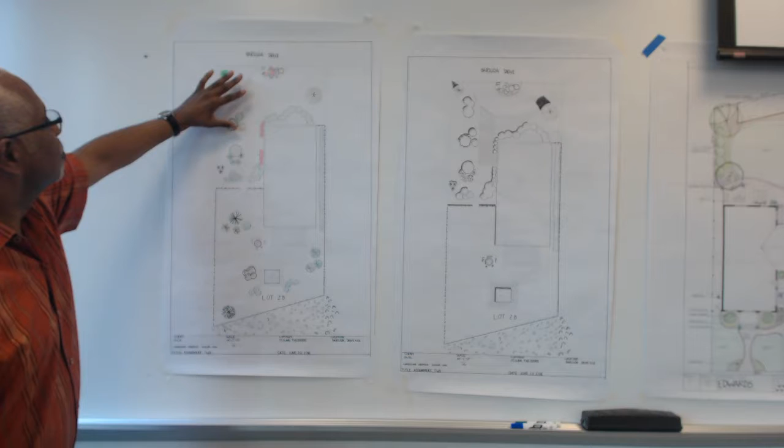The front's going to be the same, the fence. Mailbox up here. This would represent more flowers than anything else since the space is so small. But the driveway entrance is 10 feet wide, and the walkway I think I had about 15 feet. The doorway was 4 feet. Put a gate to the back of the yard, fire pit, but more trees and plants in the back of

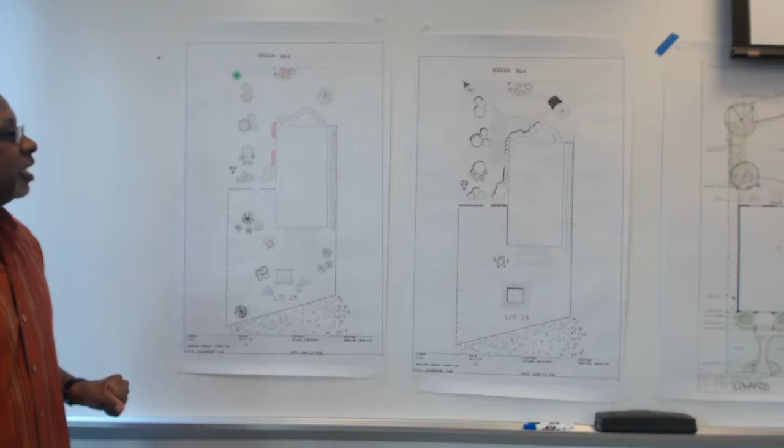this one as compared to the other. And I put wood decking around the spa this time as compared to the stone, and I did the forest land on here. The easiest thing, I guess, was getting the base plan done, and then trying to run different iterations rather than—I think some of the others had a lot of stuff in it. I made the judgment call to just try and do things differently, a little bit simpler.

The last one I have actually has the measurements for the fence line itself, the property line, the dimensions for the driveway, and that's how I broke that down. I didn't want to get too cluttered with this since I'm learning how to do this. It's okay, and that's all I have.

Hey Nancy, you want to go? We've already discussed it, but you guys didn't hear.

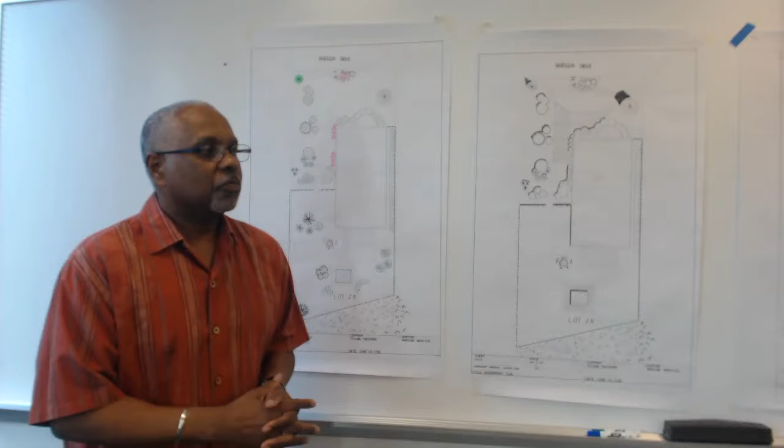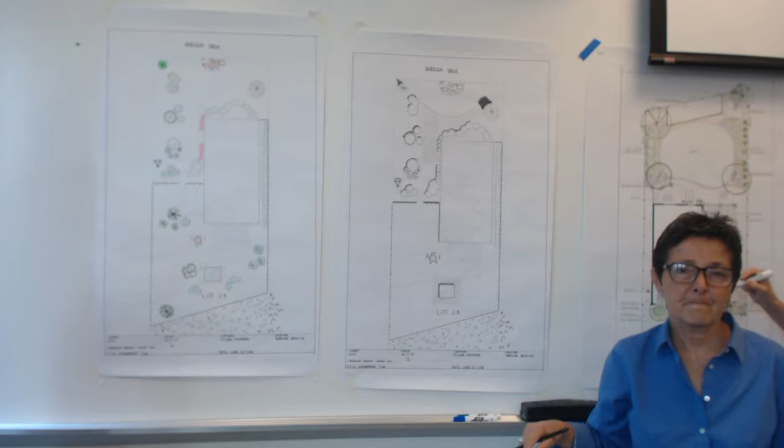St. Clair was asking, if the fence is actually going on the property line, how do you show the property line? The answer is you would actually show the property line as a long line and then a dash, and then put the fence inside it a little bit. Is that standard? Right, the traditional practice is always to put a fence line about 6 inches inside the property line so that there's no dispute with your neighbor, your client's neighbor, or whomever, about where the fence line sits. And that is a fairly traditional practice, unless there's really specificity from the client or the situation where the fence line absolutely has to be on the property line.

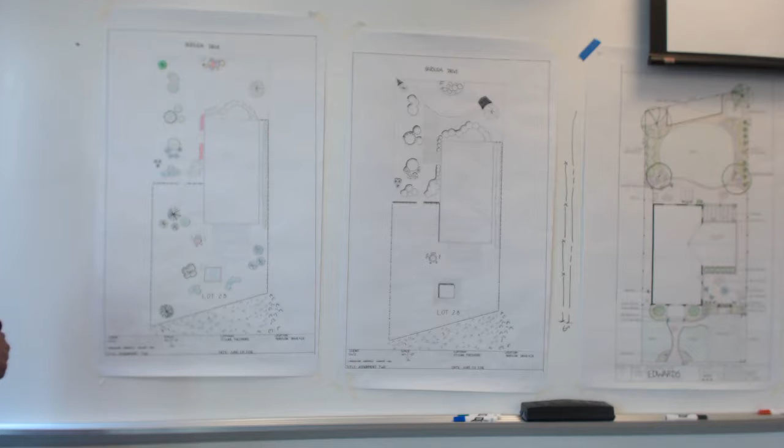And then you would only do that after it's been surveyed and pinned, so you know exactly where the property line is. I can't tell you how many sites I've been out to where fence lines are way on someone else's property or on government property, and one might wonder if they hadn't intentionally been put there. Yeah, people trying to claim extra space.

Do fence lines vary from state to state? You mean the setback part of it? Yes, because I recently hired someone to put up a fence, and he insisted on 2 feet from the property line. I've never heard that. That's not to say it's not the case, but I've never heard a situation where fence lines are supposed to be in more than 6 inches.

It's usually—there may be things that are special in that case where if you don't pull a permit, you could get in trouble putting up a fence line, but that should not affect where it's being placed. And in some HOAs or situations, the fence line actually cannot be placed in the front yard, or you can't put it beyond the building restriction line. So sometimes there's real specificity about what you can and cannot do, but that sounds like an anomaly to me, not knowing the exact situation.

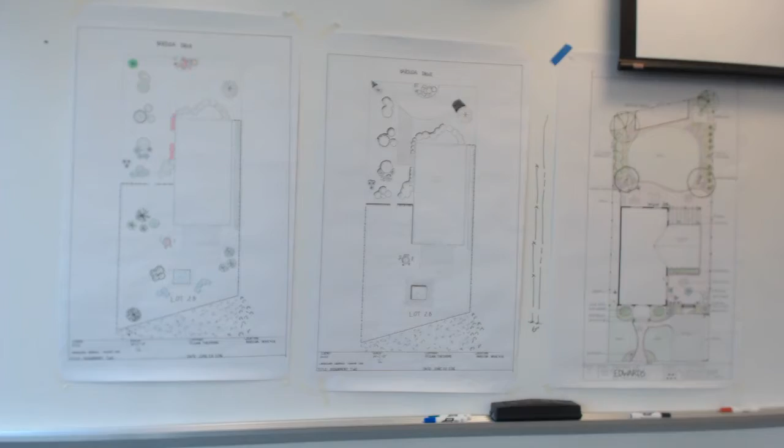A lot of jurisdictions have setback requirements of so many feet and might have different height restrictions and all. You'll get to know your local zoning folks really well soon, and do try to establish a rapport with them. If you can spend the time, go in, say hello, introduce yourself, ask for their regulations so you have it up front, so you can help advise folks accordingly.

Because it is all different, and commercial is different than residential. Well, thank you for taking a stab at the color. I know you guys are dying to use color, but you didn't have to. Nice job on your title block.

You got your graphic scale on this one. Everything else that was required is on here. So the next time you do a title block, you can start to personalize it and make it your own. You can create your own company, et cetera, et cetera.

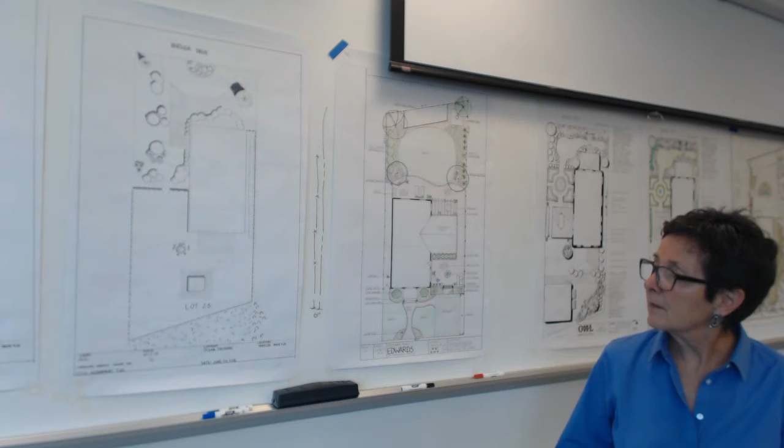Nice job on the shadows. Yes, he doesn't think so, but great first stab at shadows, very nicely done. And we talked about how we're in the northern hemisphere and they should actually be going... well, that's the western exposure since north is down. So as long as you are consistent, you may choose which way your shadows are going.

Yeah, okay, number 2 is...